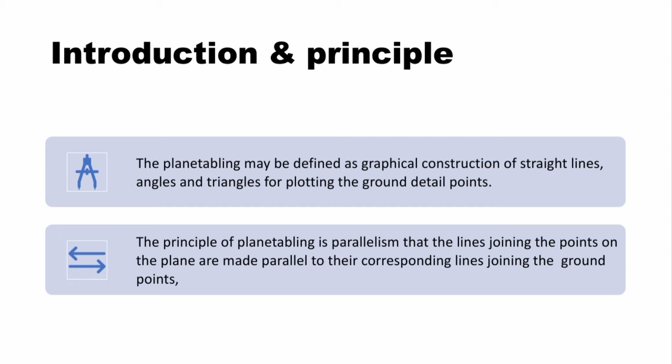Plane table surveying is one of the methods of surveying in which field observations and plotting of details proceed simultaneously. Plane tabling may be defined as the graphical construction of straight lines, angles, and triangles for plotting the ground detail points. The principle of plane tabling is parallelism: the lines joining the points on the plane are made parallel to their corresponding lines joining the ground points.

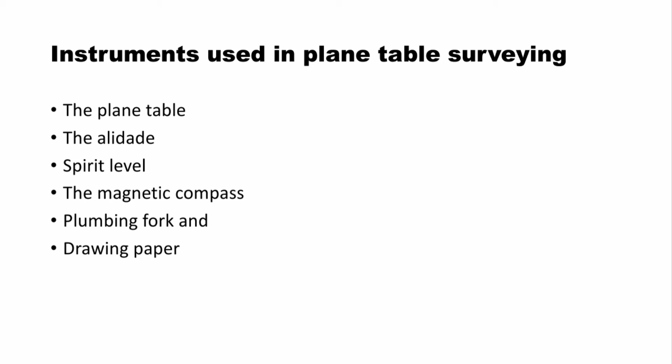The instruments used in plane table surveying are the plane table, the alidade, a spirit level, the magnetic compass, plumbing fork, and drawing paper. First one is the plane table. The plane table consists of a wooden table mounted on a light wooden tripod in such a way that the tabletop may be rotated about its vertical axis and can be clamped in any position. The tabletop is leveled by adjusting the legs of the tripod.

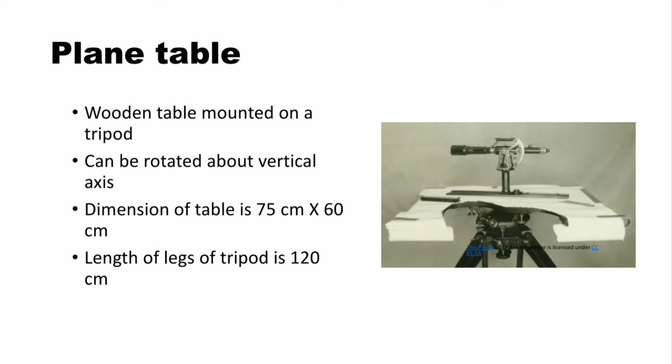The table measures 75 by 60 cm and the legs are usually 120 cm long. The instrument is made entirely of well-seasoned wood, except for the metal plate, bolts, nuts, and screws, which are of brass, and the shoes of the legs, which are of iron. The second one is the alidade. A plane table alidade is a straight edge with some form of sighting device. Two types of alidade are generally used: plain alidade and telescopic alidade.

A plain alidade generally consists of a metal or wooden rule with two vanes at the ends. One of the vanes, known as the sight vane, is provided with a narrow slit with three holes, and the other vane, known as the object vane, is open and carries a hair or a thin wire stretched between the top and bottom of the slit. The working edge of the alidade is known as the fiducial edge, and a plain alidade can be used only when the elevations or depressions of the objects are low.

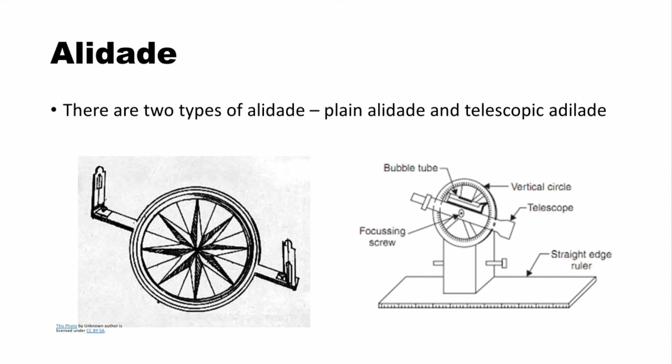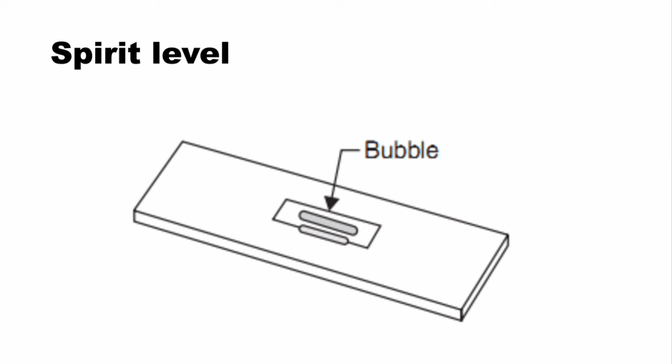The second type of alidade is the telescopic alidade. The alidade which is fitted with a telescope is known as a telescopic alidade. It is generally used when it is required to take inclined sights. The telescope increases the range and accuracy of the sight. Next one is a spirit level. It consists of a small metal tube which contains a small bubble. The spirit level may also be circular, but its base must be flat so that it can be laid on the table. The table is truly level when the bubble remains central all over the table.

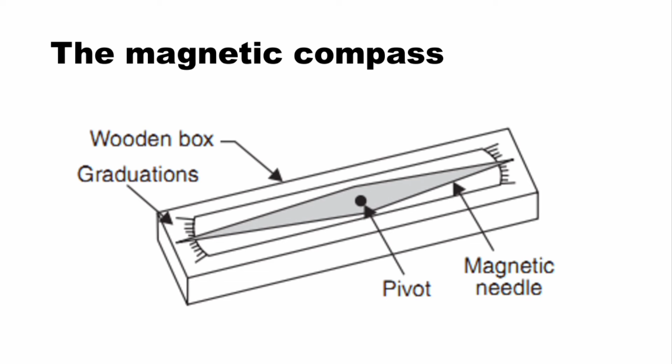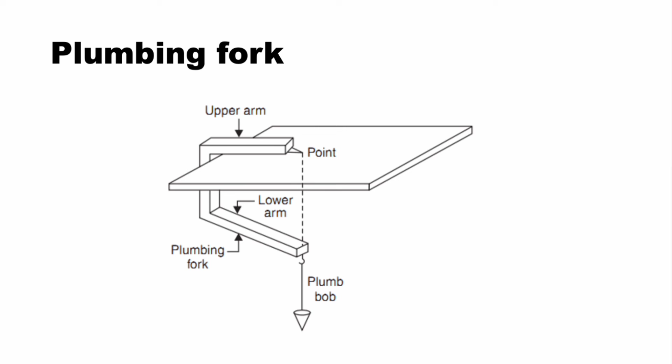Next one is the magnetic compass. A box compass consists of a magnetic needle pivoted freely at its center. It is used for orienting the plane table to magnetic north. Next one is the plumbing fork. The plumbing fork consists of a hairpin-shaped brass frame having two arms of equal length. One end has a pointer while a plumb bob is attached to the other end. It is used in large scale surveys for accurate centering of the station location on the table over its ground position. Last one is drawing paper.

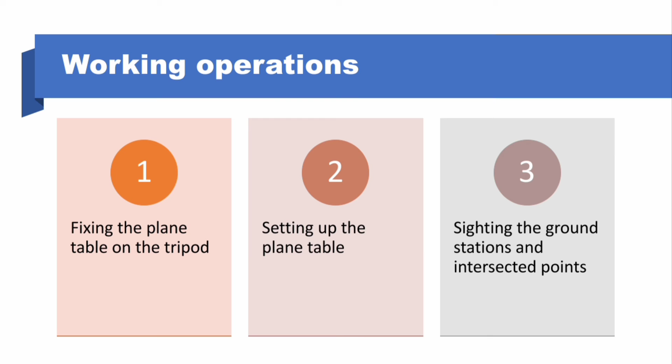The drawing paper used for plane tabling must be of superior quality so that it can stand erasing, and it should experience minimum distortion due to climatic changes. Now the working operations of plane table surveying. The following three operations are carried out at each plane table station. First is fixing the plane table on the tripod, second is setting up the plane table, and next is sighting the ground stations and intersected points.

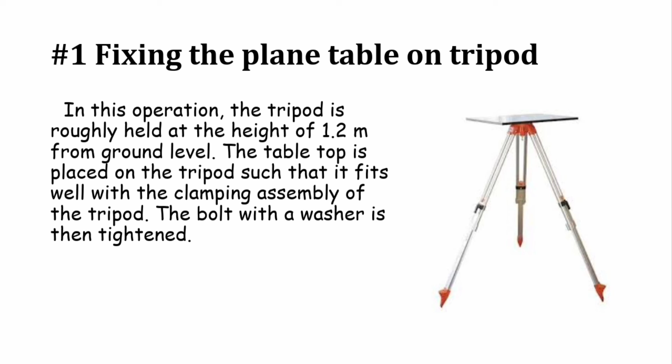The first step is fixing the plane table on the tripod. In this operation, the tripod is roughly held at a height of 1.2 meters from ground level. The tabletop is placed on the tripod such that it fits well with the clamping assembly of the tripod. The bolt with a washer is then tightened. Next one is setting up the plane table. The setting of the plane table consists of three operations: first is leveling the plane table, second is centering, and third is orientation.

In leveling, the tabletop is made truly horizontal. For rough and small scale work, leveling can be done by eye estimation, whereas for accurate and large scale work, leveling is achieved with an ordinary spirit level. Second is centering. In this operation, the location of the plane table station on the paper is brought exactly vertically above the ground station position. For rough and small scale work, exact centering of the station is not necessary, and only the center of the table may be centered over the ground position. It is done by the U-fork, that is, the plumbing fork.

Next one is orientation. In this operation, the plane table is set at a station such that its edges make a fixed angle with a fixed direction. Orientation is a process in which the lines joining the locations of the ground stations on the sheet are made parallel to their respective ground lines. It is done by two methods: orientation with a magnetic compass and orientation by back ray.

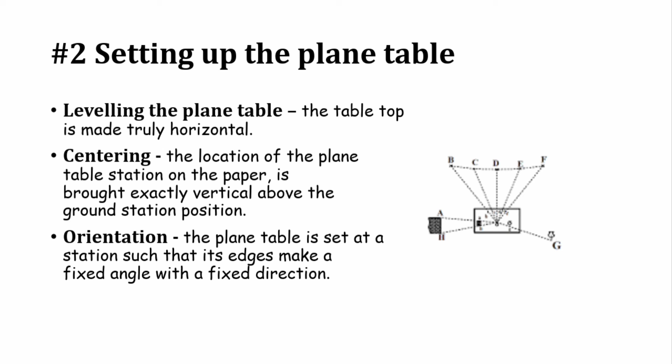And the last working operation is sighting the ground station. In this operation, the table is accurately centered and leveled over the ground station. The ground control point is sighted through the sight vane of the alidade such that the station, the thread of the object vane, and the slit of the sight vane are all in a straight line.